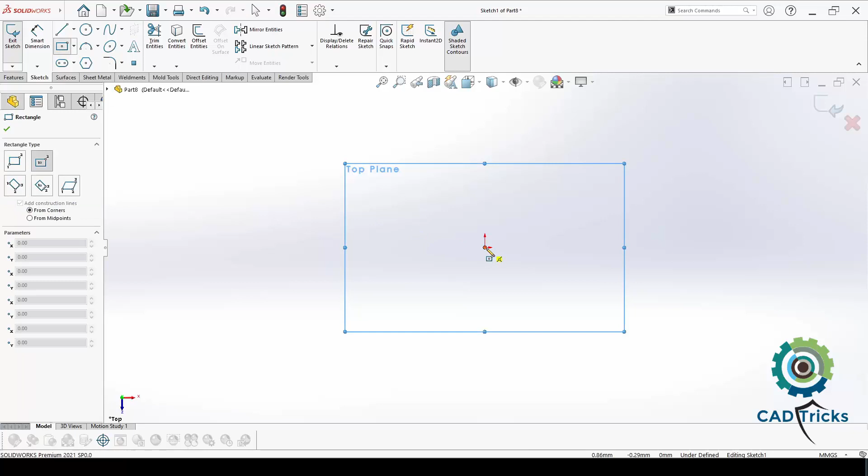As usual, we are starting from a plane to make a sketch. Here I will start with top plane. Then I will start drawing a rectangle 75 millimeters by 56 millimeters. Then I will go to features and select extrude. I will extrude it by 18 millimeters, then OK.

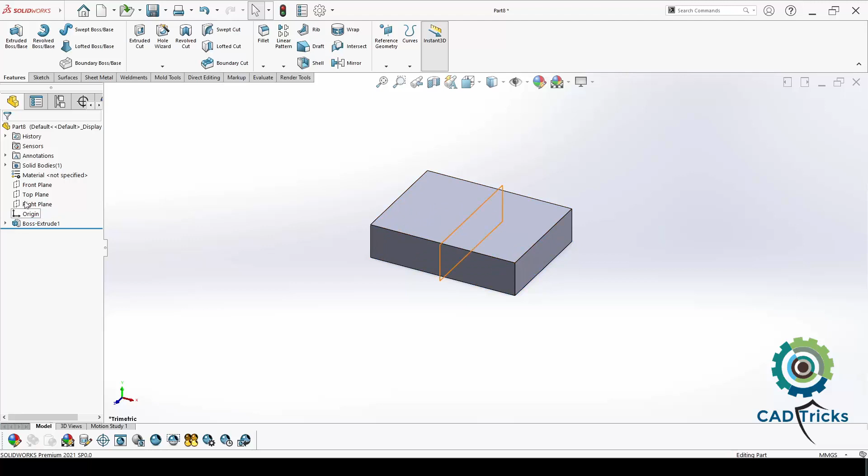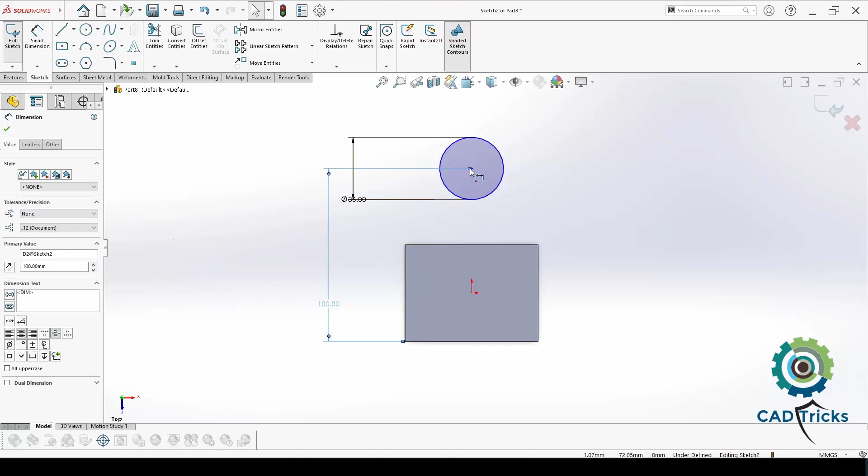Then in top plane again I will choose a sketch and draw a circle up there, 36 millimeter, and distance from the lower edge is 100 millimeters, and center of the circle and origin are vertical on the same line. Then I will go to extrude, but I will not extrude from here. I will extrude offset from top plane by 36 millimeter. I will extrude it by 25 millimeters.

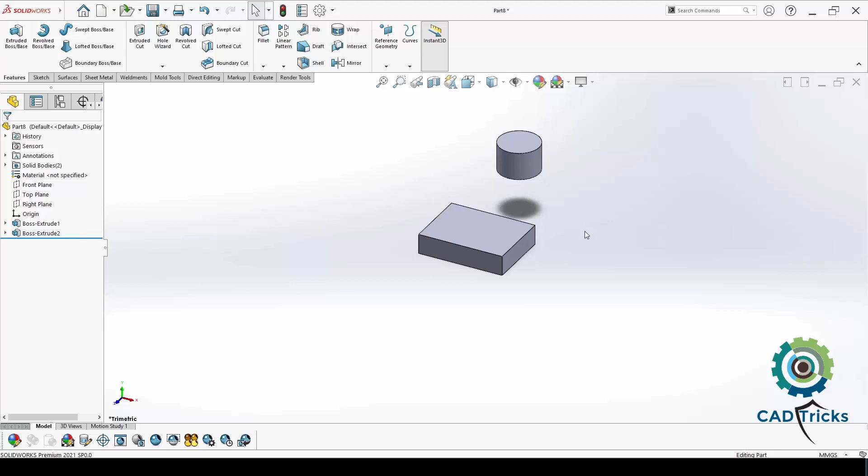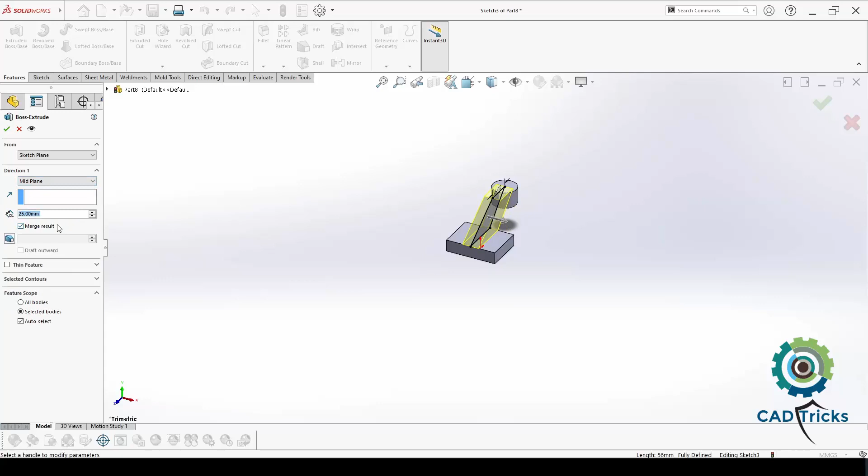Then I will draw a sketch in right plane. I'll make a line here and a rectangle here, 36. And make it mid plane, 12 millimeters and OK.

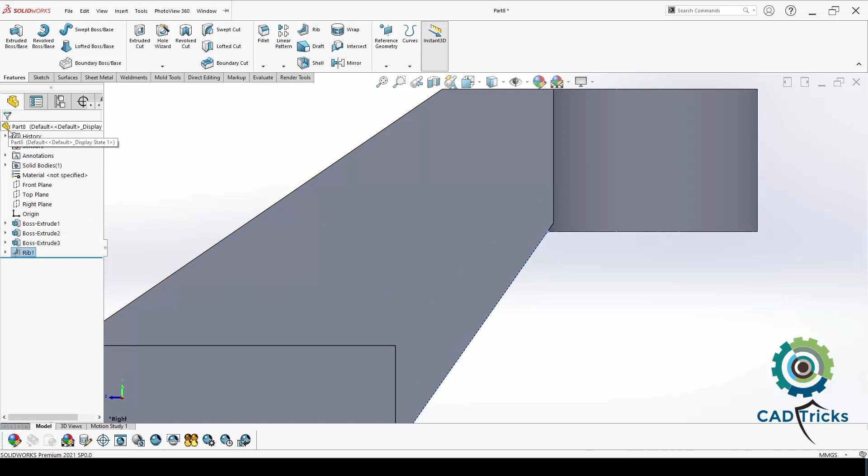Right plane again, I want to make a rib from here to here. Go to feature and select rib, make it 12 millimeters and OK.

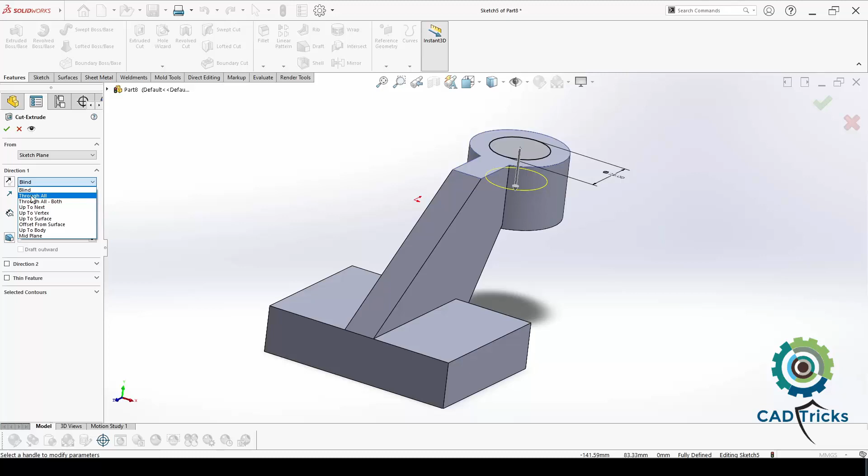Now I will draw on the surface a sketch. I will choose a circle and draw it by 22 millimeters and go to feature and select cut extrude through all and OK.

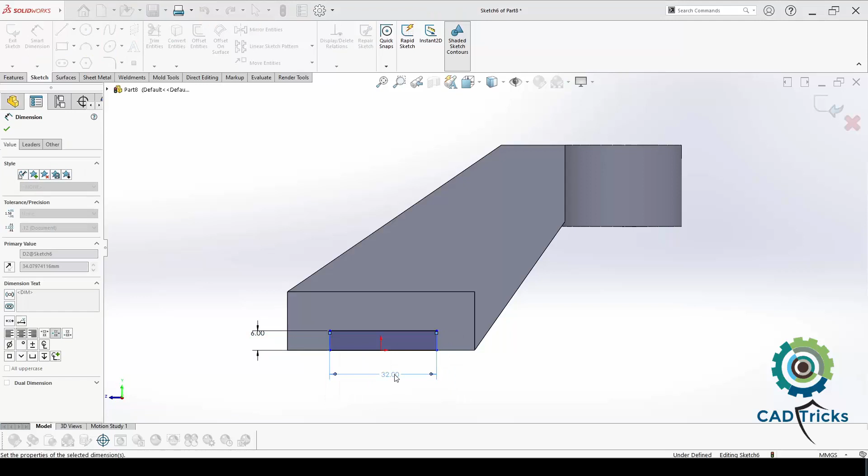On the surface I will choose a sketch. I will make a rectangle from here to here. Its height is 6 millimeters, width is 32 millimeters, and from this right corner it's 12 millimeter. Then I will go to features and select cut extrude, choose it through all.

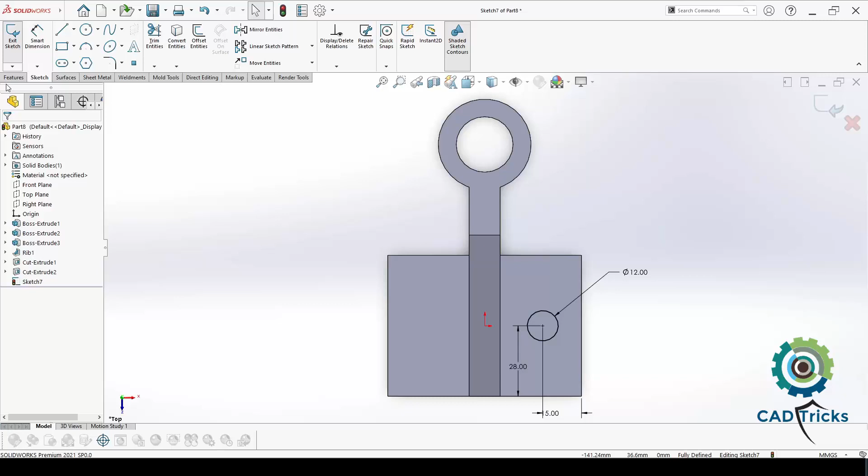From top plane I will draw a sketch circle on the right side. I will add dimension to the sketch, 12 millimeter. From the right side it's 15 millimeters. And from the lower side it's 28 millimeters. I will extrude cut in the other direction and through all.

And I will make mirror for the circle. Choose a sketch around right plane. Here we are.